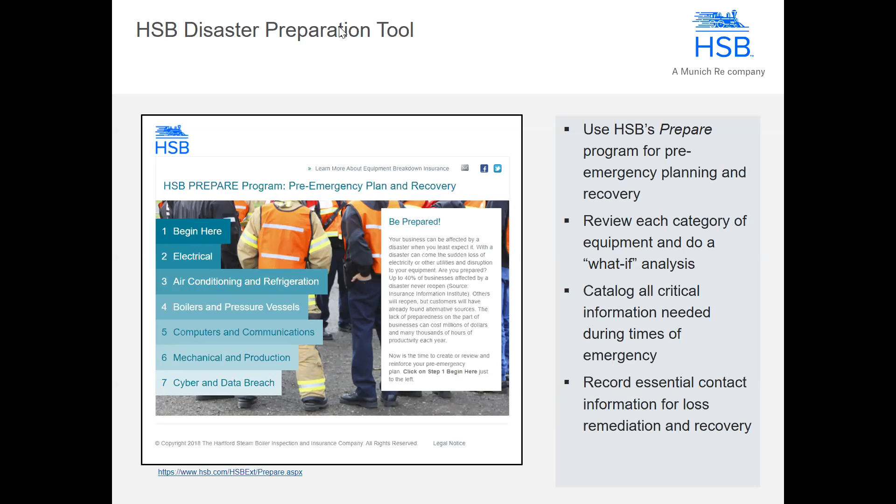Go to the next slide, please.

Some of the things that we ask for are obvious to most people, but if you're in the military, police, fire, and EMS, you're constantly reviewing and training on emergency scenarios. I would suggest all of you do that too. You should check your plan periodically to make sure it is up to date, at least annually. Are your contractors still willing to respond if needed?

When we talk about outside resources, one thing we want to make sure we do is not just list the local resources you utilize for normal day-to-day operations and minor emergencies. If you have a major flooding or other situation affecting a large area in and around your community, all of those local resources are either going to be temporarily out of business, or they may be tied up with their own problems and unable to respond to you quickly.

What we're suggesting is that you keep your primary contacts and talk to them regularly to make sure they're ready to respond and have the right equipment, but also develop resources far beyond the normal area, maybe 50, maybe even 100 miles away, so that if there's a major situation impacting your area, you can contact resources outside the impact area who may not be experiencing these problems, or at least not to the same extent, and bring these resources in.

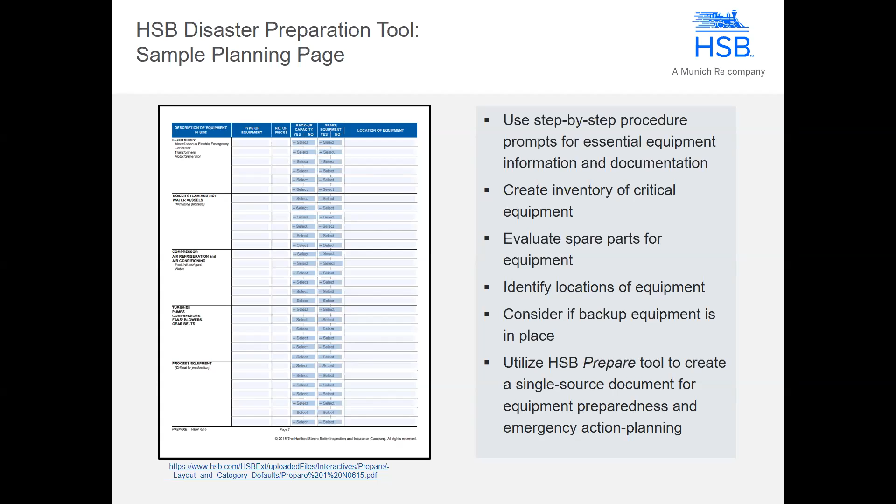And again, the time to look at these is not the day before a storm. I would suggest that maybe after this session you go on the website, poke around and see what's available to you, and at least earmark it for a review somewhere down the road before the next major event happens.

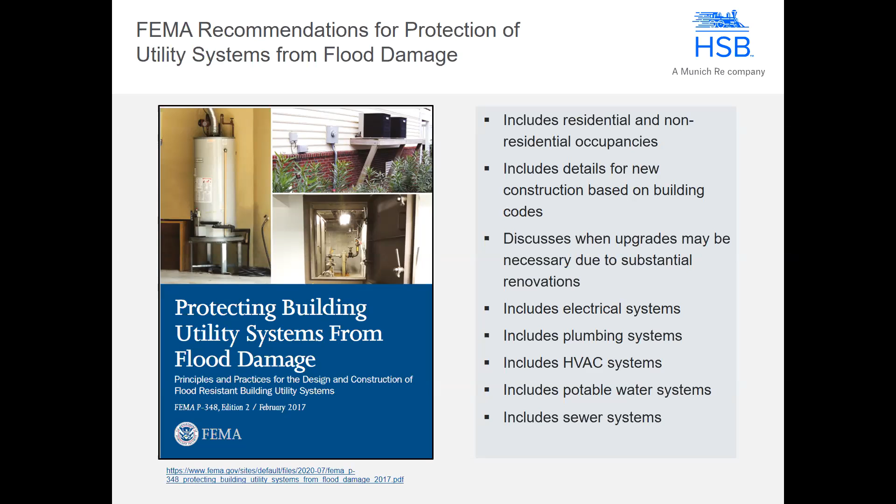Let's flip the page, please.

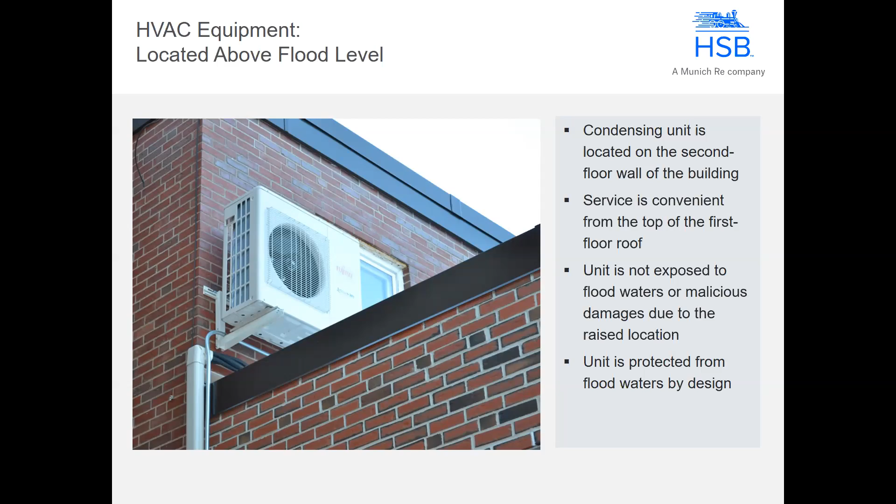We'll talk about boilers and flooding in locations. David and I were talking about this after some of the major flooding problems, hurricanes, and superstorms over the past 10 years. A number of different organizations and municipalities have taken their boilers and relocated them to upper floors. If that's a possibility, that's a great way to reduce that type of problem.

You also want to make sure you relocate all the electrical controls and panels. So even if the bottom of the boiler gets affected, the electrical systems won't be adversely affected, and it'll be a lot easier to get these back online.

Take a look at the other types of services, whether it's a gas line to the boiler or fuel lines, and make sure they're in the highest areas possible and rerouted to keep them out of the water area.

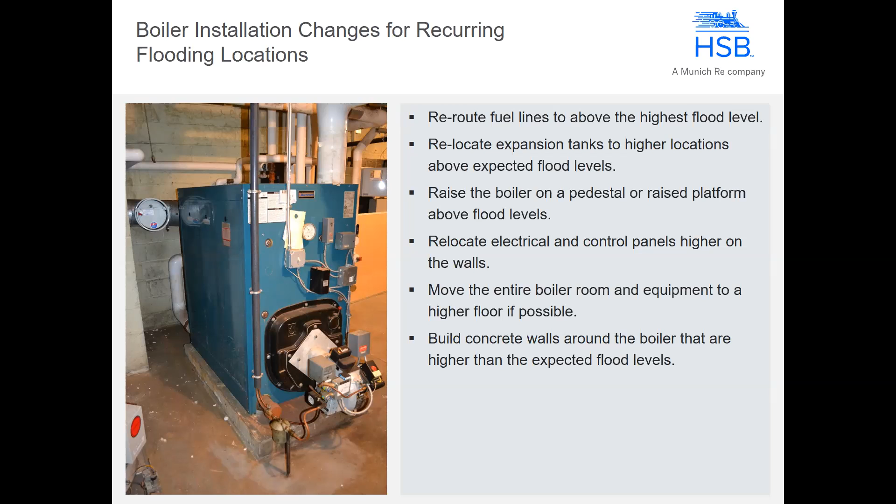I'll flip to the next slide.

Do your people know how to construct these so that they are able to withstand the flood waters? They don't easily get pushed out of the way just because you have flowing water nearby. It takes a little bit more than just winging it. Sometimes you have to actually talk to people in the construction business to see how they would have handled it, and be able to construct these sandbags, berms, and dikes so that they do withstand the floods you're expecting.

Also, you have to take a look at how you're going to get water out of the area. If you're going to be running pumps indoors, obviously electric pumps are the safest. You don't want to run any kind of gasoline-operated or other petroleum-operated pump or motor in a facility, but you may not have electricity.

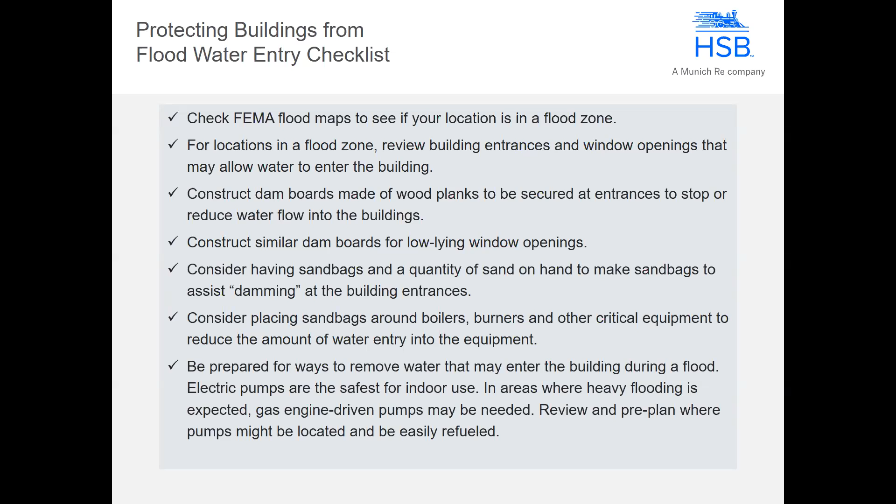Are the connections still in good shape? Have the hoses rotted? Do they have to be replaced? Also, if you're going to be running these gas or other types of pumps, do you have enough fuel on hand, and is it adequately protected against the flood to get to the areas where you need them, without being affected by the storm and the storm water? Next slide, please.

Obviously, you should be testing your emergency generators on a regular basis, checking them, doing preventive maintenance, and all those good things. When you test them, you absolutely want to run them under load. Start them up, put them under a good workload, and let them run for a significant period of time. If you go back to the manufacturer's instructions, they usually tell you to operate them for at least an hour or two under load to make sure they're running properly and producing the electrical energy needed. That goes for whether it's a fixed generator on a site or a portable generator.

Another consideration: if you're using gasoline or diesel powered equipment, do you have the proper bonding and grounding equipment so that when you transfer those flammable or combustible liquids from the containers into the generators or pumps, they are properly protected against any kind of sparking or electrostatic discharge? So you should review the proper bonding and grounding equipment that's needed, and make sure your people know how to do it properly.

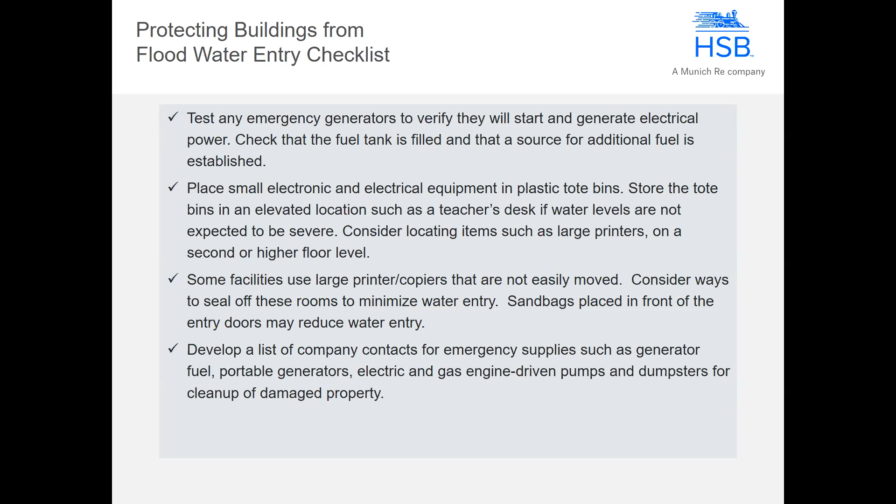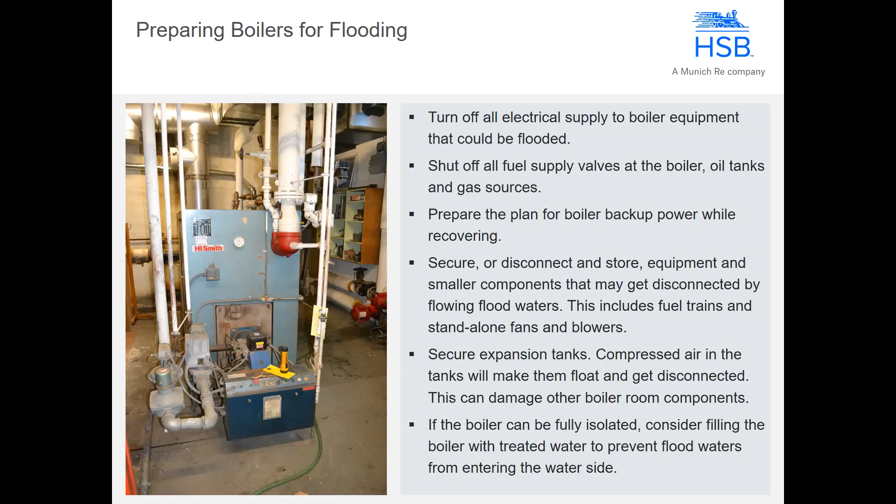Secure and disconnect anything that you can. If you can disconnect them and get them to an upper floor, that's great. There may be some smaller equipment that you can do that with, and it's going to save you a lot of time and money to get this equipment back up and running. This also talks about securing different expansion tanks and compressed air tanks. You've got to remember, if the water's high enough, they may start to float around and bang around and maybe damage other components. So take a look around the room, secure everything you can - anything that could potentially float or be damaged by something floating - secure it properly, guard it, get it out of the area if possible.

Okay, you've had the bad situation, you've had the flood. Now what do you do? Well, obviously you want to go in there and remove the obvious debris, mud, whatever. But you should default back to...

...the experts that can service that equipment properly and the original manufacturer's information on how to get this equipment back up and running. People who just go in and try to wing it often cause more damage to the property, as well as potentially to themselves if they do it improperly. If you don't properly clean this equipment and get it back to good operating conditions, when you flip that switch you could severely damage or destroy the equipment, and possibly cause personnel injury too. You don't want any injuries at all for any reason. So don't attempt to test or operate it unless you follow all the manufacturer's recommendations and have an expert on hand who's gone through that equipment and made sure it's in good operating condition.

Take a look around - has there been any erosion in and around your facility or the equipment? Whether it's a pad-mounted generator outside or your boiler in the basement, water can severely undermine the area, and whether you're operating that equipment or not, over time it can settle, damage the equipment further, and cause other losses - possibly even disconnecting or rupturing the supply lines and causing significant pollution and other damage.

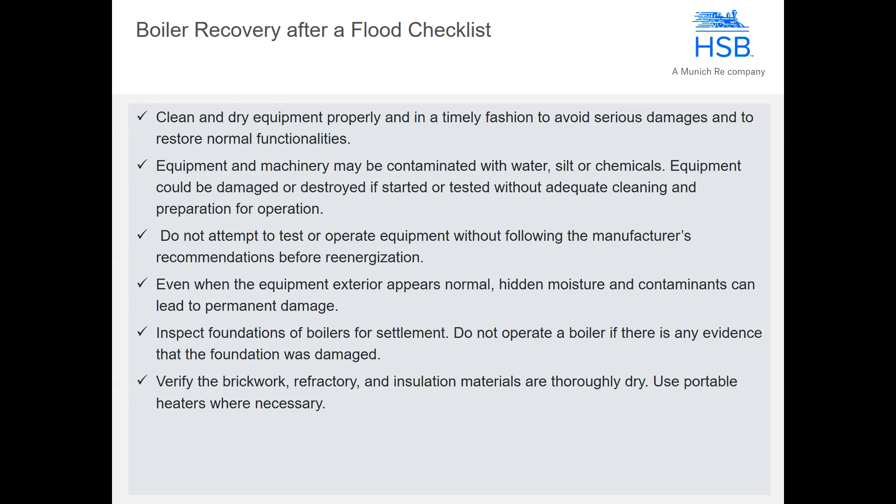Again, going through the checklist, I'm not going to read all of these things, but the water from the flood is obviously polluted, could have all kinds of contaminants in there, silt, chemicals from places upstream, sediment, who knows what is in there. Assume the worst.

Everything should be properly inspected and disinfected. There are procedures depending on what the contaminants are on how to decontaminate these things. Again, personal protection is of the utmost importance, so make sure everybody involved knows what the hazards are, has the proper personal protective equipment, and is following all the procedures, not only in the operation and decontamination of the equipment, but the decontamination of their own selves, getting out of the hot zone back into a cold area, is of the utmost importance.

But again, as they're doing their job, they should be checking and inspecting every aspect of the equipment, not just the main boiler per se, but going through all of the instrumentation, all of the wiring, every valve and line leading up to this piece of equipment should be checked to make sure it's in good condition and hasn't been damaged in some way by the event.

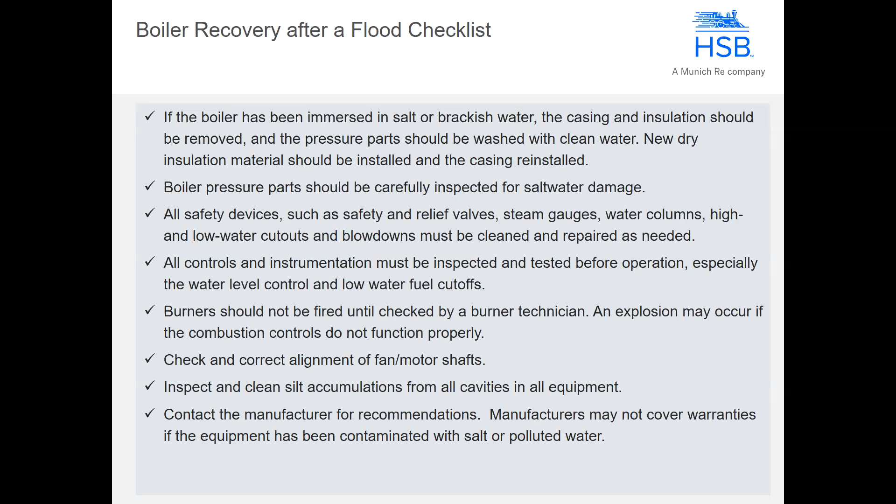It's not just the main pieces of equipment that we're talking about disinfecting, powering, and repairing. Take a look at every ancillary piece of equipment out there. You've got feed water systems that feed into boilers, for example. You've got to go through those, make sure that all the components are tight, and that there have been no adverse effects from the flood waters, no contamination of the feed systems. If there has been, they have to be flushed and disinfected properly. Otherwise, you're going to be putting contaminated materials into your boiler, which is obviously not a good thing.

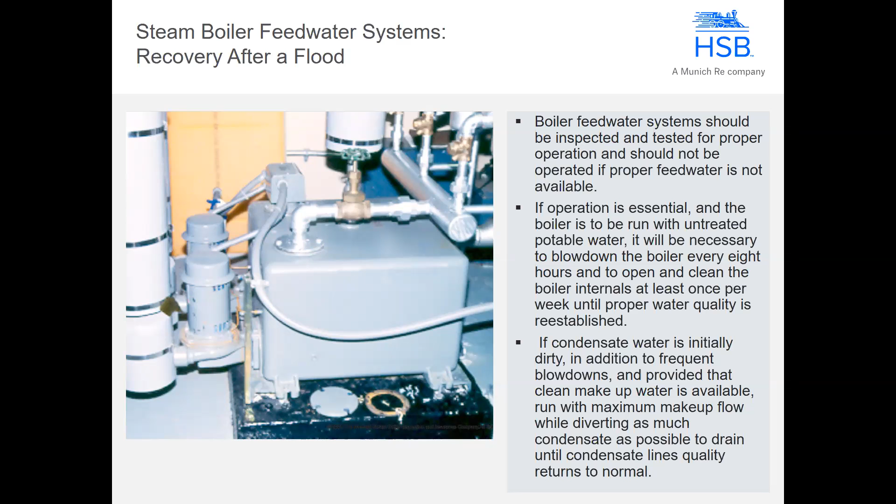Repair and recovery. Electrical equipment, and especially HVAC equipment, is very susceptible to damage. Just like the boilers, you have your main pieces of equipment that you have to go through. For HVAC equipment, electrical is a very, very big part of the exposure. You should have a qualified person going through every aspect of the electrical equipment to make sure all of the components are in excellent shape before trying to return these to service.

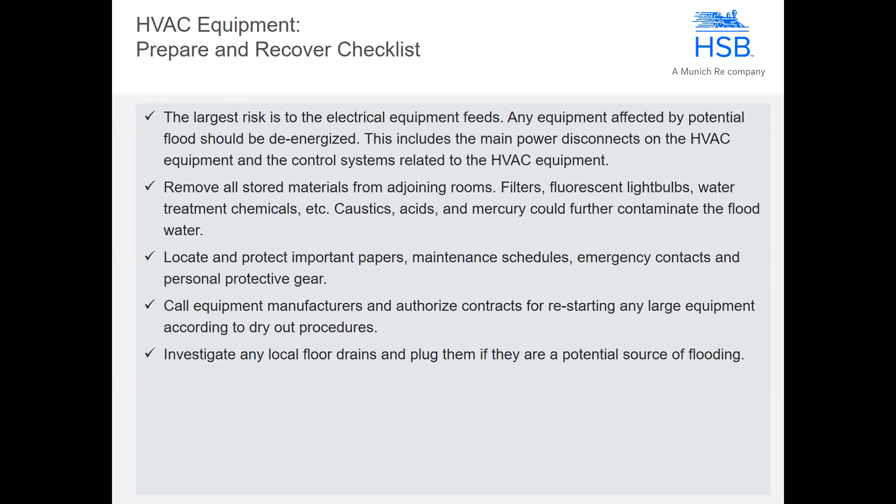Another thing that you should be doing also is making sure all of the manuals and paperwork for everything in your operations, whether it's equipment manuals, boiler certificates, or any documentation you have prior to the flood, are removed from the area and secured properly so that they are available when you have to use them coming back from the flood.

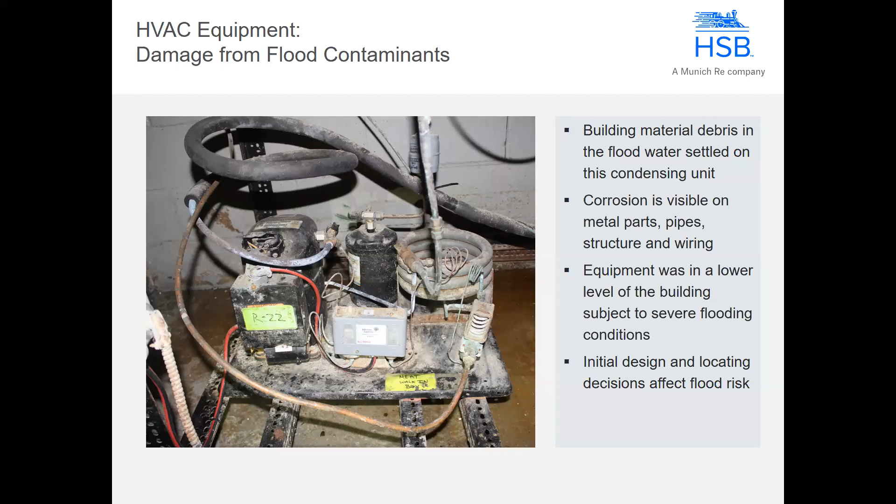You should go through all of the equipment. As you can see here, you've got a lot of sediment that has accumulated on the equipment. The water and other contaminants have caused some potential corrosion on the equipment. So some of this may be salvageable if decontaminated properly and put back into good operating condition. Others are going to have to be scrapped and totally replaced. Again, an expert in that equipment should be advising you on what should be done and making sure it's done properly.

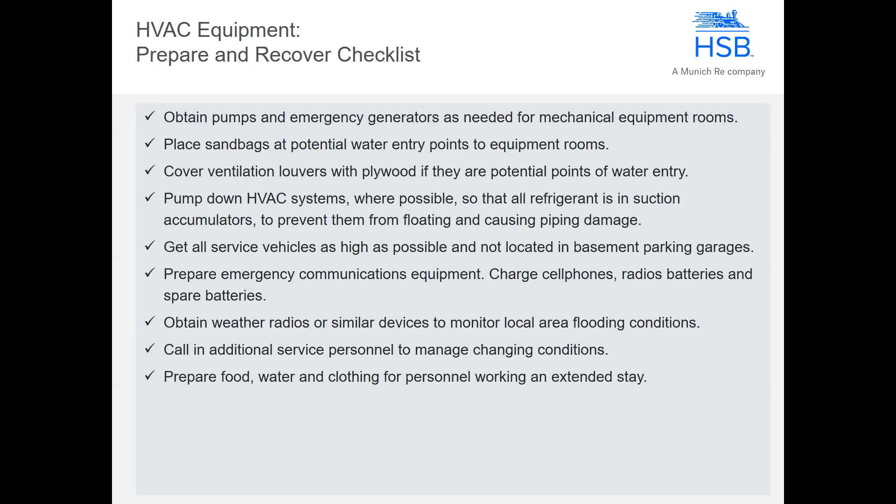Part of your pre-plan should be what you're going to do to get the systems back up and running, and how you're going to protect the people. It's going to take a lot of effort from a lot of folks, so you've got to be prepared to feed them, get them potable water, and if necessary, they're going to have to be there for extended days. You've got to be able to put them up in shelters and have them rest at night so they can come back in the morning fresh.

FEMA has a lot of good documentation and information that you can use in your planning and recovery, and NEMA, the National Electrical Manufacturers Association, has a wealth of information on electrical equipment, not only protecting it, but getting it back up and running.

All of your work should be supervised by a licensed electrician, somebody familiar with the most recent codes, since they change on a regular basis. We want to make sure everything is done to the newest code, so it's properly up and running, protected, and able to give you the most reliable service going forward.

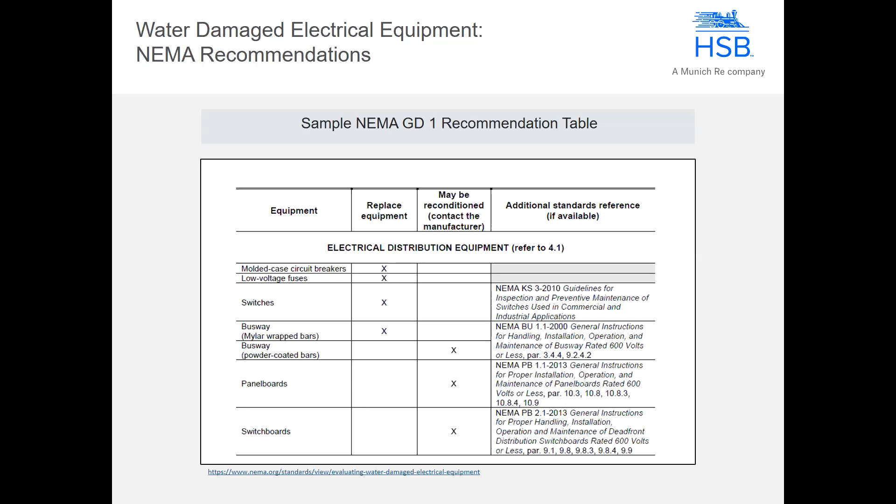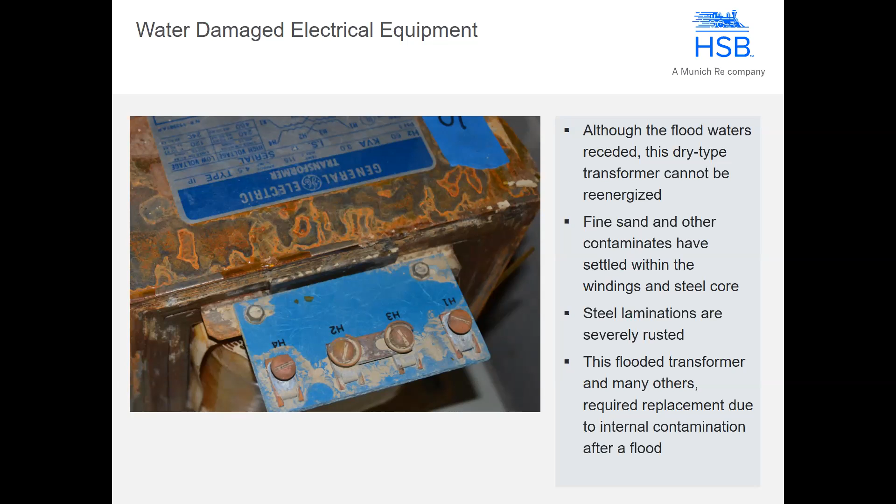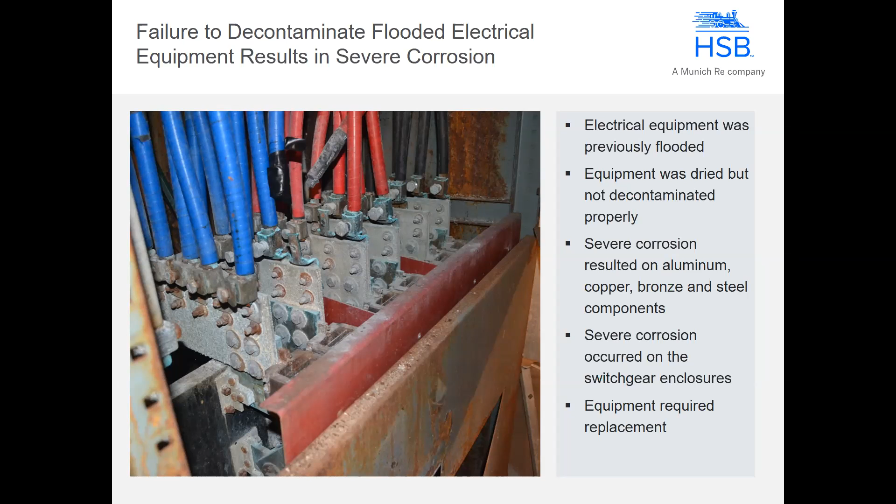Next slide - again, we have some more electrical equipment here. Equipment can be dried and should be dried, but if it's not properly decontaminated, you're going to have a lot of corrosion and potentially arcing and sparking down the road if you try to energize it. Every single piece of equipment must be evaluated, since you have different types of materials - copper, bronze, whatever - and these interact differently with water, salt water, or other contaminants. They have to be taken apart and properly reconditioned, if possible, before being put back into service.

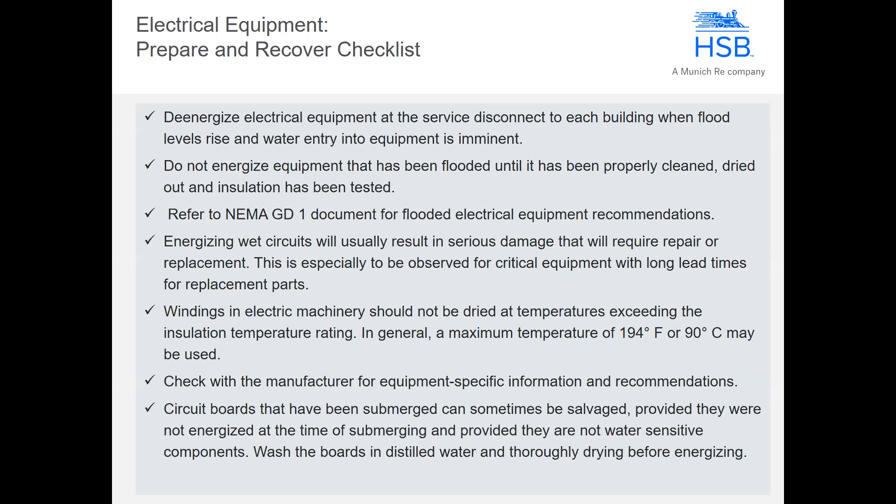Your best intentions to get this up and running may have been to save a few bucks, but if you don't do it properly, you're going to damage this equipment - and not only that equipment which will have to be replaced, but if you tried to energize it, it could take out a lot more equipment. So if you don't do it right, it may damage large portions or all of your different systems. Doing it, and doing it right, are of the utmost importance.

Printed circuit boards - go to the next slide. Printed circuit boards are a big deal. Once they get contaminated, they're very problematic to try to clean and get back in service. It can be done, but you have to have professionals very skilled in this, with the right equipment and the right knowledge to get these things back up and running.

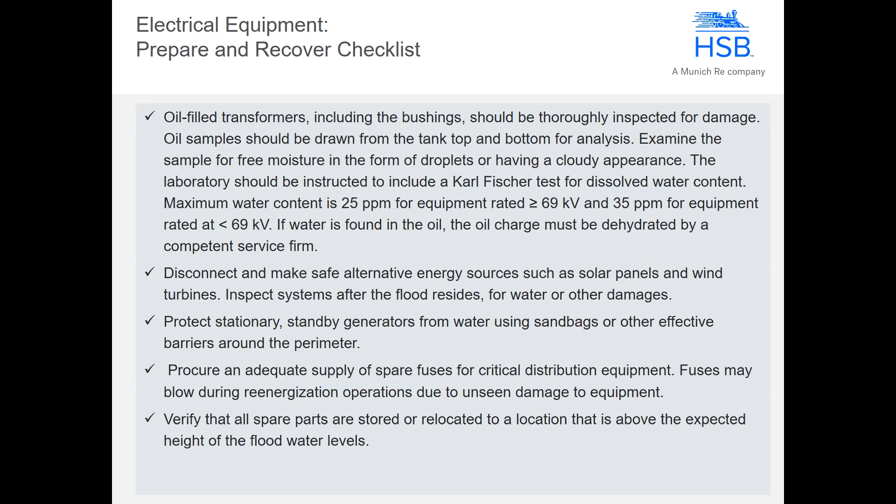In the old days, before printed circuits, it was a lot easier to decontaminate these problems, but now everything in the building is running on a printed circuit, and in some cases even your fluorescent lights and other types of lights have some sort of PC board, a very small printed chip in them. So everything needs to be decontaminated properly. Next slide.

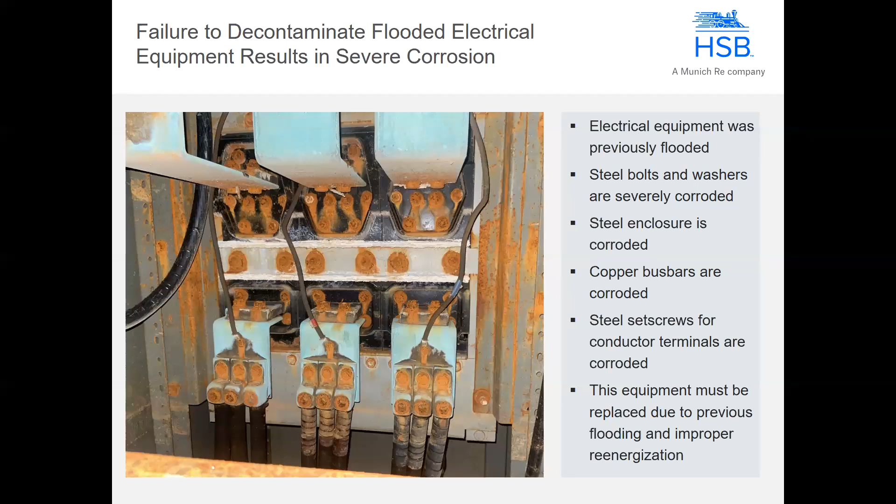And here we have some other electrical equipment. As you can see, the steel bolts are severely corroded here. Copper bus bars are also corroded. Everything in here is corroded. It may not be able to be rehabilitated. You may have to replace everything here, but only a qualified electrician should be making that determination.

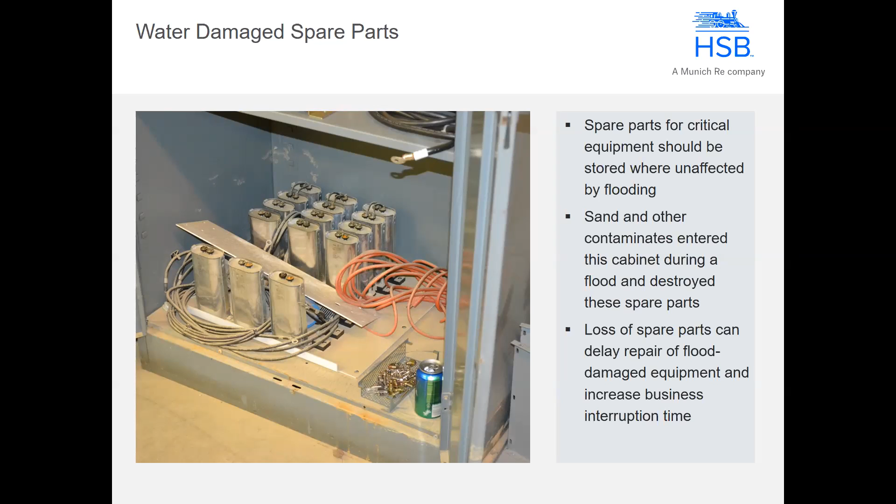Even if it doesn't look like it was adversely affected, make sure everything is opened up, inspected properly, and even check the spare parts that you're keeping in cabinets to make sure that they weren't adversely affected, so that when the time comes that you need them, whether it's for this event or some other event down the road, they haven't been adversely affected and you're surprised that you can't get back up and running.

IT equipment. If your IT equipment goes down, whether it's a 911 center or just the IT equipment that you have in your public works garage or in your town hall, if that goes down, you could be down for a significant period of time and could be losing a lot of time and money.

Make sure, not just for an event, but review all of your backup procedures for everything. Do you have proper offsite backup? And when I say offsite, it may not just be in the next building over, because it could be adversely affected by a catastrophic type event. So make sure that you have backups that are in areas that aren't going to be adversely affected by the situation that you may find yourselves in.

Prior to a problem, make sure that everything is disconnected properly, powered down properly. If you can remove the equipment, a lot of our computers and minis and even the mainframes now are small enough that they can be properly disconnected and moved to a non-flood area. Great idea. Take the time to review all the steps necessary so that when you do have this event, you can do it in a timely fashion.

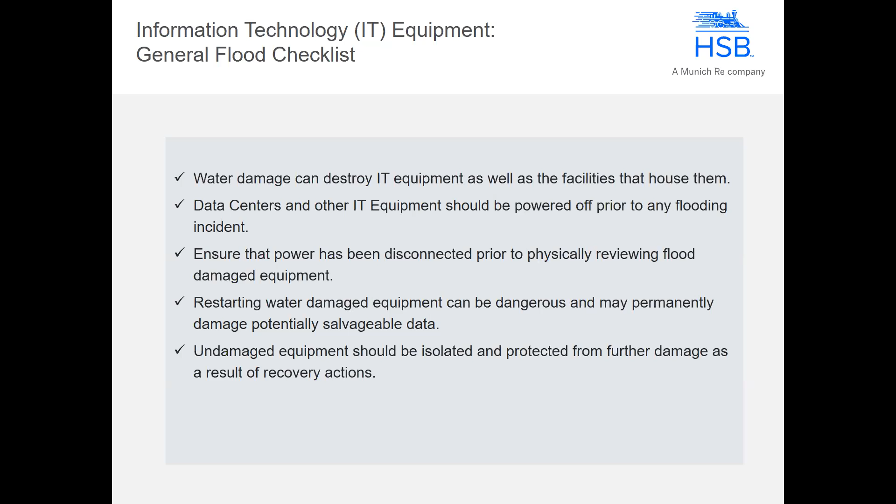Power supplies, everything electrical. As you know, water and electricity just don't mix. And flood waters and the contaminants, they ruin everything. So if you do have battery backups for anything, and they're subjected to flood waters or other types of contaminants, you've got to go through those to make sure that whether they're sealed or not, all of the components are inspected and brought up to good conditions before trying to utilize this equipment. It's often overlooked, but a major sore spot when it does occur.

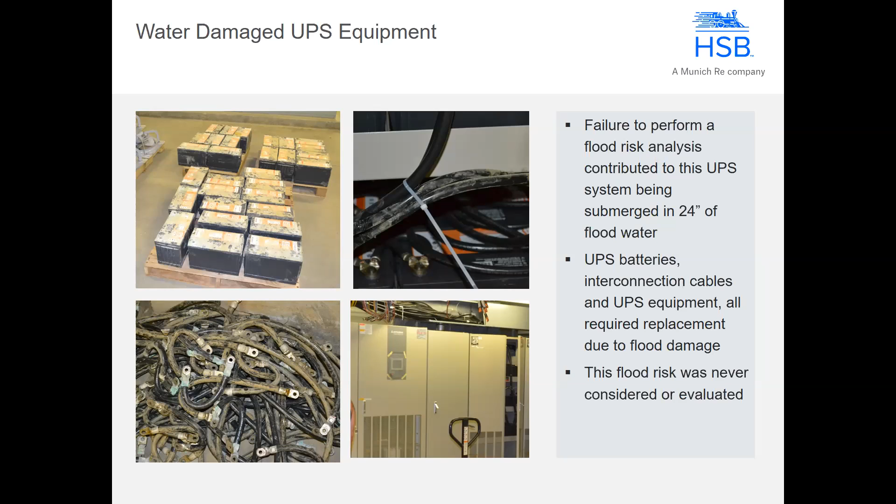Again, on an after flood checklist, assess all the equipment that was subjected to damage and get that repaired and replaced. And for the equipment that you were able to move and relocate to an unaffected area, make sure that your IT personnel go through and properly hook everything up, or supervise the hooking up and re-energization of the equipment. Don't leave it to us amateurs to do it. Otherwise, you may adversely affect the equipment and cause some other downstream damages.

It's a good time to review your business continuity plans. What to do if you're going to be down for a significant period of time. Do you have an alternative site with the proper equipment and the backup material that you can operate your facilities at some remote location? Again, it doesn't have to be a 911 center. It could be something as simple as the accounting department for your town hall. If you're not up and running, that could upset major operations for your municipality. So take a look at the continuity plans, test them out on a regular basis, and make sure that they are up to snuff.

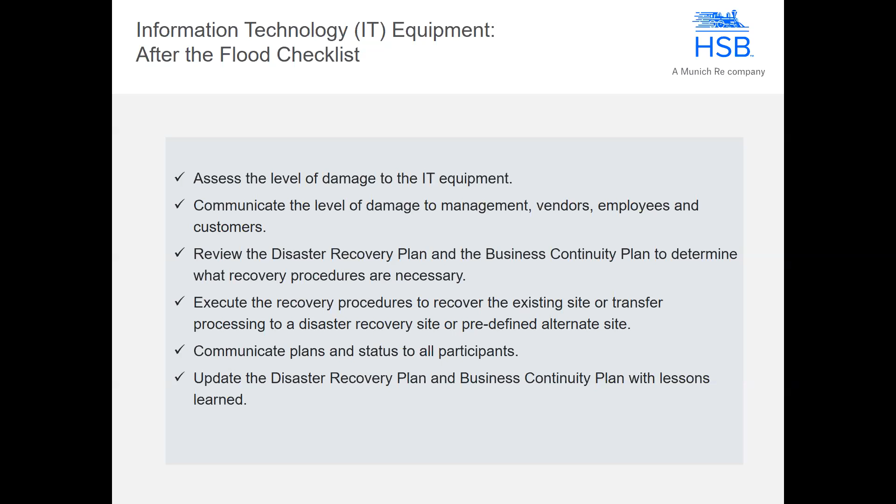Next slide, please. Again, more things to look at with the advent of cloud hosting sites. Some of the backups are more readily available and easier to use. But again, it's a good time to test to make sure, know where these clouds are, what's being backed up and when, and making sure that your people are doing all of the steps necessary and backing up when they're supposed to be backing up.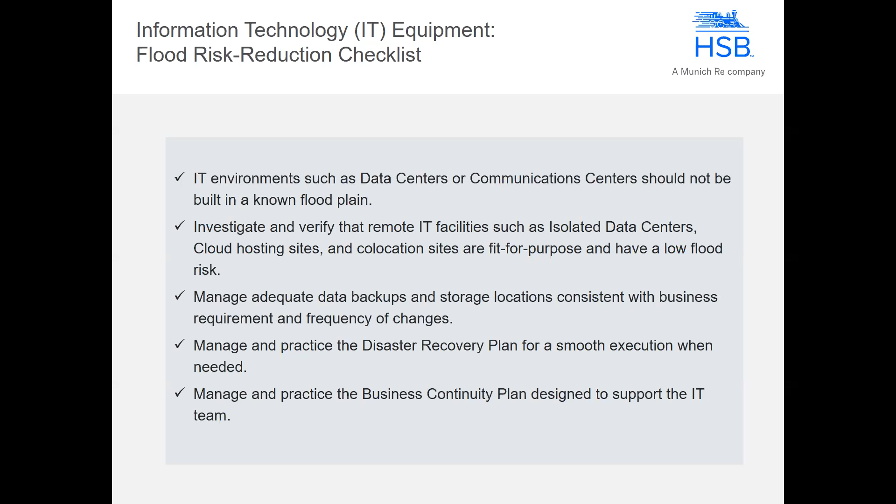It's good to go through and do audits of these systems on a regular basis to make sure that everybody's doing things and not cutting corners. On a regular basis, you should be doing it, not just prior to a storm or a flood situation.

That's basically it. I think we've got a couple more minutes. I don't know if any questions have come in. They mostly want the slides, and I put my email up there.

And with the many details that Bill talked about today, you can see that this is a complex issue, and it really takes some thought beforehand and a lot of evaluation beforehand as well as after. There's unfortunately no shortcuts to this sort of thing. Water touches everything that is in its path.

Keep in mind too that when an event like this happens, it's real clear cut - it's happened, and you have to go through and evaluate the potential damage. But consider too that some of your equipment is in damp locations to begin with and should be periodically evaluated. It's not uncommon for us to go into, for instance, a water plant and see a transformer with a significant amount of rust on it or whatever.